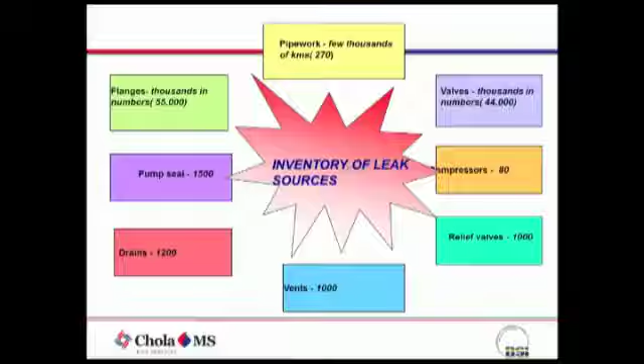The other two things which we play around with and which we know we don't have much grip on is the software part of it, because there is software linking all these things. Yes, we have evolved, but we cannot always say that we have mastered the way we are controlling the reactions. Then the third most important thing which we have not mastered at all is what?

It is nothing but humans. So we don't know when someone will behave in a correct way or not, why he will press a valve, why he won't respond, because the research that is going on is to see how we minimize the alarms in a control room. So you will find that a lot of times a lot of alarms are coming in.

So when a normal person enters, you wonder why he is not responding to so many alarms, but actually in reality a lot of it is information. So a person who is there normally doesn't react, or he may press acceptance and then react to some. So it is a big science by itself, alarm management. So what I have shown you here is only the hardware part of it.

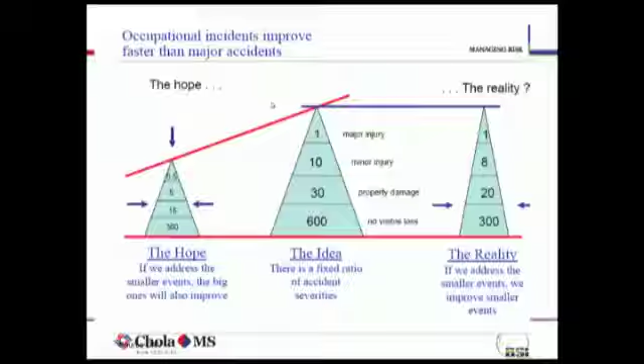The other thing is there is always a relationship. As they say, everything does not happen all of a sudden. Even a catastrophic failure: suppose a 12 mm thickness vessel is there, if it has to have a hole, slowly the thickness has to reduce.

Otherwise, okay, some external object impinging on it making a hole is different, but if it has to fail on its own, over a period of time it gradually reduces because of corrosion or misuse or wrong products being fed into it, then slowly the thickness reduces. So we do not notice that suddenly it fails.

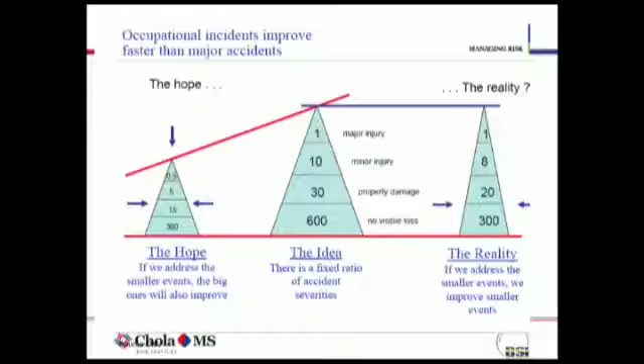So in the same way, there is a theory that for every one incident there will be 600 incidents or happenings which will give a prior notice that something major is going to happen, or the ratio is that for every 600 no visible loss incidents there is going to be one major injury. That is the reality, that is what the equations say in the factory with respect to injuries.

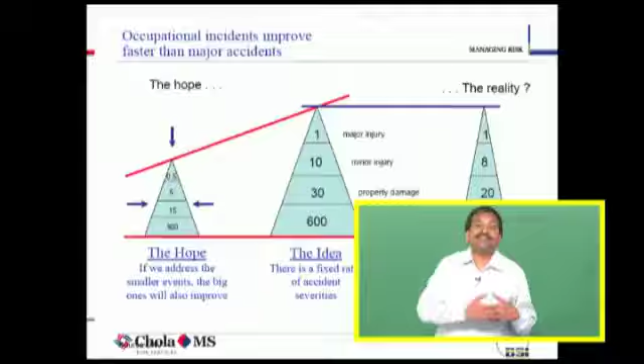That means if somebody has broken his hand or leg or something, before that there will be so many incidents, but people will not notice that this is happening, it is kind of a near miss, and then ultimately one big incident happens. This study was done a long time back, but in process safety unfortunately the ratio is not so large. So every 11 process incidents can result in a fatality. I hope you understand the difference.

Okay. Now a lot of research is going on into what is meant by process defect. If a safety relief valve pops up, is it an incident? Because it just popped up, pressure is more, it popped up and then sat back again, right. If it is happening continuously, do we need to investigate? Is it an incident? Today there is no mechanism by which we are capturing those process related incidents. So that is where the trick lies.

The research is going on how we capture those process defects. Again, you need to define what exactly you mean by process defect. If 1 kilogram of something comes out of a overflow, can it be called a process defect? Can it be failure of some XYZ mechanism? That is something we need to look at.

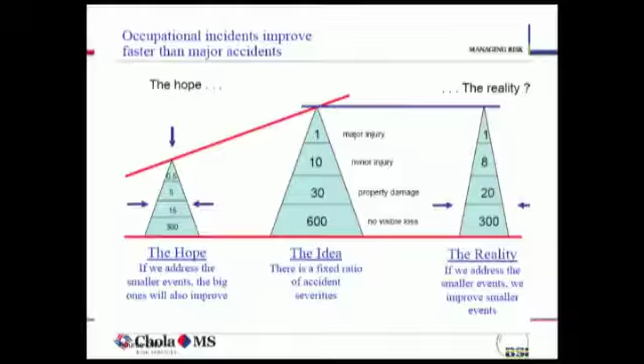So, I hope you are able to get the relationship between the both. In process safety, the ratio is 11:1. In case of industrial safety, normal safety, the ratio is anywhere between 300 to 600 to 1. So this is the major difference, and that is the reason we need to concentrate more on the process safety area.

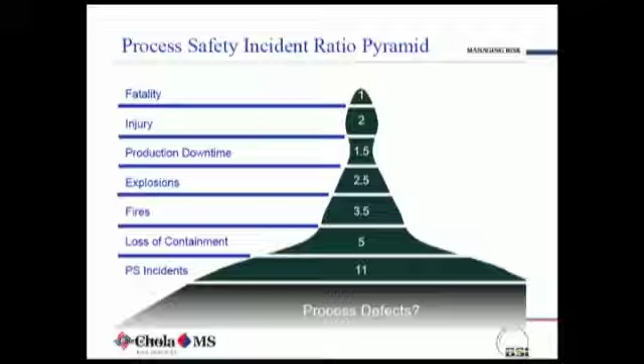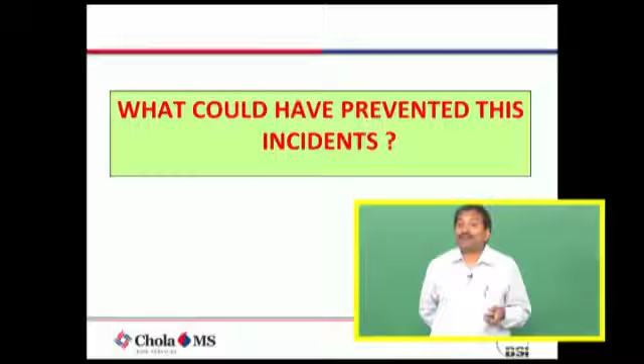Now, what could have prevented these incidents from happening is something that question will ask. So, just being aware about process safety, will it produce those results, or do we need to do something more, is something that is important.

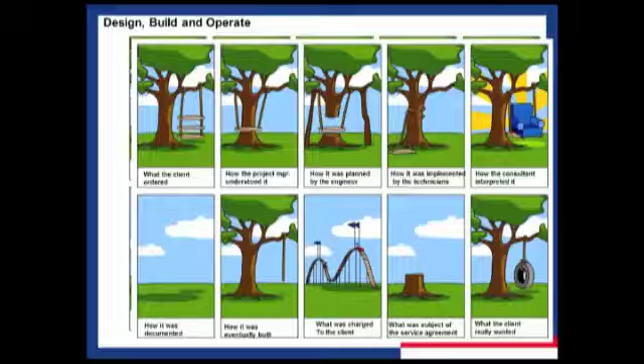So, every time a designer designs things, everyone will have their own imagination to implement things, and then in the process something else happens. So, in process safety also you will find this kind of thing finally happens, and the design many times fails.

So, there is a broad definition of what process safety management is. I hope this was not covered earlier, correct? Covered? No. So, what is process safety management? It says: proactive and systematic identification, evaluation and mitigation or prevention of chemical releases that could occur as a result of failures in process, procedures or equipment.

So, broadly what it is saying: process means your hardware part of it, say temperature, pressure and other things. Procedures is your software part of it, SOP, safe operating procedures, or how we run the plant, and equipment. So, what can result in a chemical release?

So, the point that needs to be noted here is that process safety management evolved as a result of major disasters in the chemical industry. But now the trend is that process safety management is getting applied even to the engineering industry, to oil and gas, and even to steel. Because process safety management talks about proactive and systematic identification, evaluation and mitigation of process, procedures or equipment, and all three things are there even in a steel plant.

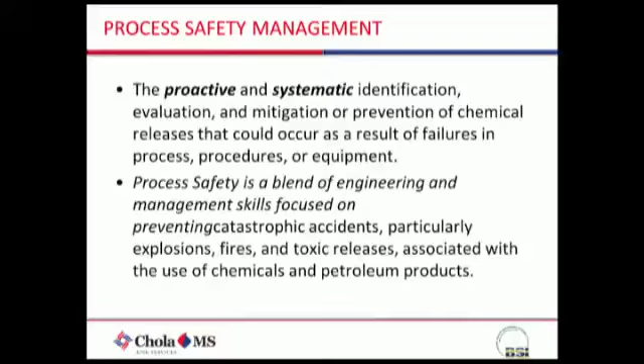See, actually after the Bhopal gas tragedy, a lot of work started in PSM, because one thing that was felt is that normal safety systems are not able to predict this kind of major accident. So, there should be something more that needs to be done. So, when we come to the elements, you will find a lot of elements look very simple, and you will wonder why PSM gives a different color, but the way it is applied is what makes a difference.

So, the goal, that is the fourth line, that is important. The goal is to minimize process incidents by evaluating the whole process. So, a holistic approach to process management is what is making it different from the other approaches of controlling major releases.

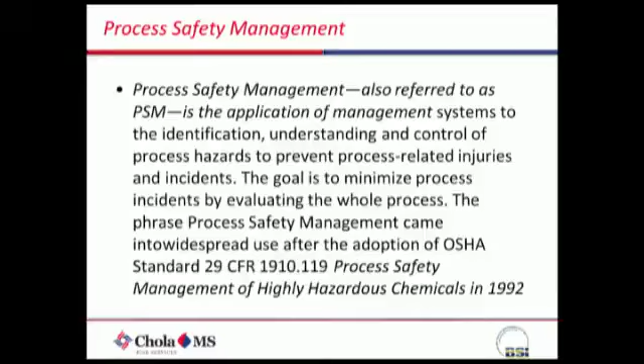So, what happened is, as the definition of process safety propagated to other disciplines like electrical, electronics and other things, each of them came out with their own interpretations and definitions. This is IEC, International Electrotechnical Commission 61511, which is talking about functional safety, which some other lectures will talk about. They have defined risk arising from the process condition caused by abnormal events, including basic process control system malfunction. So, they were talking about DCS systems.

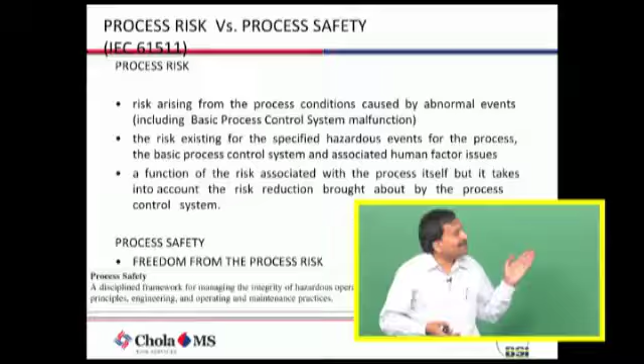So, because the system is not functioning properly, I think you have seen that video of the Texas BP refinery, where you have seen that the basic measurement was not proper, and it was filled to more level than what the instrument can gauge and all that. So, they are relating it with abnormal conditions that can happen because the process conditions are not correctly controlled.

Then the risk existing for specified hazardous process events for the process, the basic process control system and associated human factor issues, a function of the risk associated with the process itself, but takes into account the risk reduction brought about by the process control system.

See, what happens is, when you broadly define the risk, everyone will ask, okay, so we have this control system. If this control system fails, then we have some other containment system. Even if this containment system is having some problem, then we have other control system to mitigate the risk. Then why should we worry so much? So, in process safety, when you systematically evaluate the various risks, you will also give credit to the existing risk control measures, right.

I will make it very simple. Say, suppose this building is there. What can go wrong in this studio? It can catch fire. Now, if it catches fire, then what happens? Everything gets destroyed, right. So, what is the basic control measure that is there? Fire extinguisher is after the fire starts, but first detecting that there is a fire. So, you will find some smoke detectors and other things. So, that is the fundamental thing that you detect, that is one level of control.

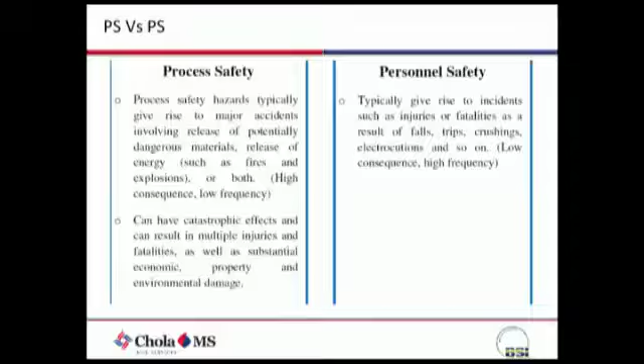Now there is a comparison which I already mentioned to you: one typically gives rise to major accidents, the other typically gives rise to incidents such as injuries and fatalities. The thing you need to know here is that fatalities happen on both sides. It is not that only slips, trips and falls fall into personnel safety; fatalities can happen on both sides, but the severity will be quite high on the process safety side.

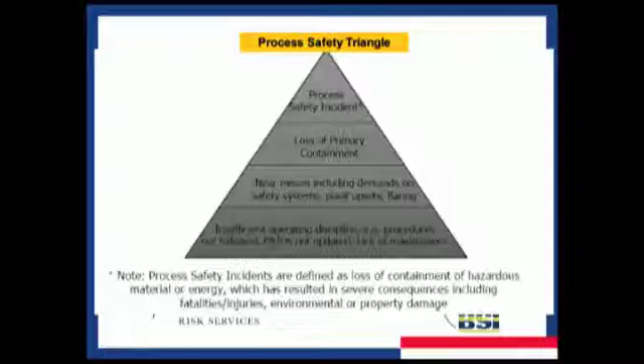Like the injury triangle or safety triangle, they have also constituted what is called the process safety triangle. The topmost thing, which you call a process safety incident, will primarily be loss of primary containment. That means you have a vessel and material has come out of it; that is the major thing that can happen. Near misses, including demands on safety systems, plant upsets, and flaring, are one level below.

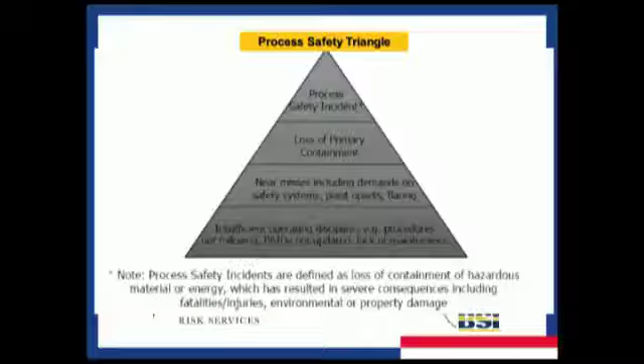Before loss of primary containment happens, there could be near misses, including demands on safety systems. Suppose it's a 20 feet vessel; you will not fill the vessel up to 20 feet. Up to what level will you fill? Maybe 18 feet. So what will you put there at 18 feet? You will put a high level alarm, correct? Yes or no? Then you will have low level just one step below, and above that you will have high level, right. So those are all near misses, including demands on safety systems.

Your valve or your pump is supposed to close at 17.89, but it has touched 18 and it has triggered. That means maybe the sediment level is more. There could be so many other things which have resulted in that, or the valve is passing, or maybe there is a defect in the gauge.

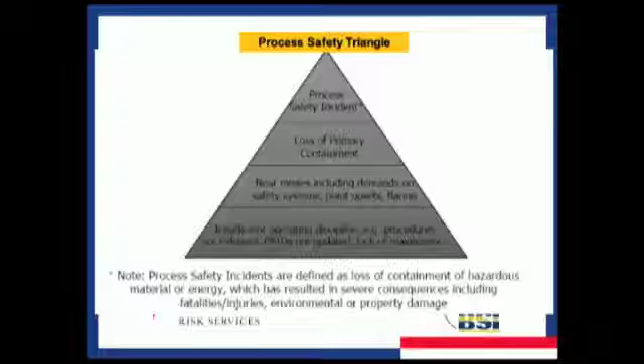So, those are all the things which we will talk about: near misses, including demands on safety system and plant upsets. Flaring is something which is always investigated, because it is not from the economy point of view, but you are forced to send it to the flare, right. Flare is nothing but a process upset, then it goes straight to the flare, apart from the normal things that happen. So, whenever flaring happens, that also sometimes is recorded.

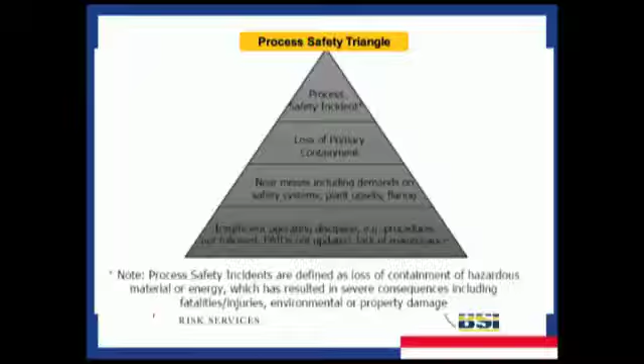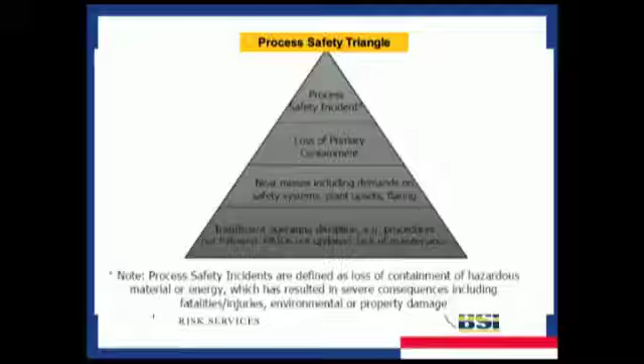Then insufficient operating discipline, for example procedures not followed, P&ID not updated, lack of maintenance. So, these are all the bottommost rung. Before a process safety incident happens, these are all the things that can go wrong, like insufficient operating discipline. What does it mean? Because for every operating plant you have something called operating parameters. The operator is supposed to follow that rule book, but supposing he does not follow, then operating discipline is not there.

Then procedures not followed means he has to follow certain procedures of loading, unloading, maintaining pressure, temperature and all, but over a period of time we develop so much confidence in the process that we know, okay, this is the shortcut, or this is the way we do. So, that results in the procedures not followed. P&ID not updated: piping and instrumentation diagrams. You may make changes, but then you do not modify that in the as-built drawings. So, that can result in that.

Then lack of maintenance: you need to look at the maintenance of equipment, but then you give priority to production, and that results in this. So, from the bottommost, if you do not have operating discipline, you do not follow the procedures, which can lead to near misses including demands on safety system, which can result in loss of primary containment and finally lead to a process safety incident. So, that is how the sequence follows.

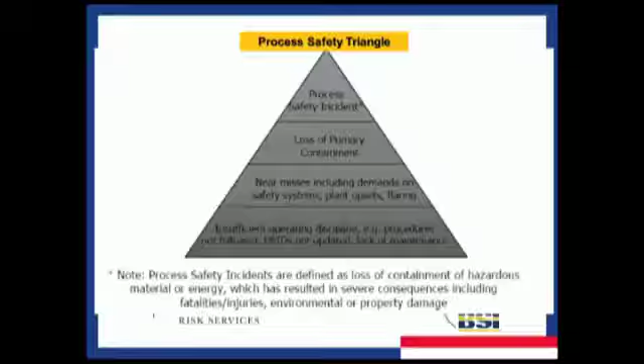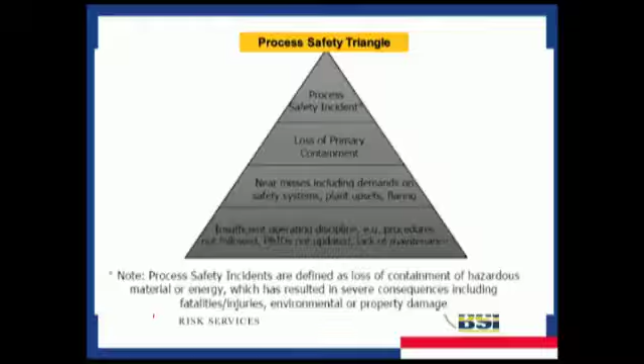Now, there are some myths, because PSM, to be very honest, in India is not yet accepted. I would say still only a handful of companies are following PSM, for a variety of reasons. One is lack of understanding, lack of expertise, and third is that we also have insufficient knowledge on some of these things. And the fifth important point we should keep in mind is that our legislation does not mandate PSM yet. We are all legislation-driven people; we do not follow certain things because they are good practices to follow.

We still, quote unquote, think that something needs to be done because the government said so. So, PSM is not yet mandatory. Some of the myths associated with PSM: a lot of people think that it is a performance-based approach, or that one approach is do whatever it takes on your facility not to have accidents. Some people think like that. No people, no PSM. An analytical tool focused on preventing release of highly hazardous chemicals, and some people have a misconception that PSM deals with trips and falls.

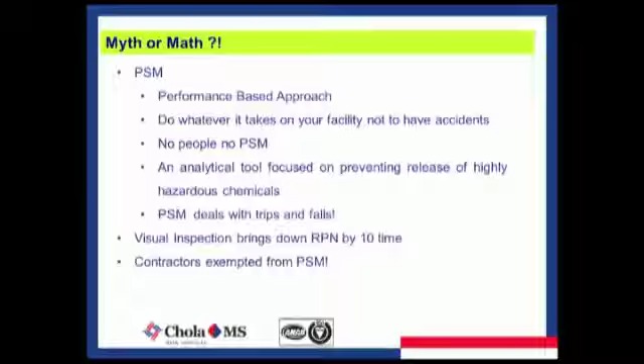Another most important thing is contractors exempted from PSM, because if you see some of the factories now, except the core operations, the rest is all run by contractors. Even in public sector undertakings, you can find that a lot of things are run by contractors. So, you can't differentiate contractors from the main operators. Contractors are also required to follow this.

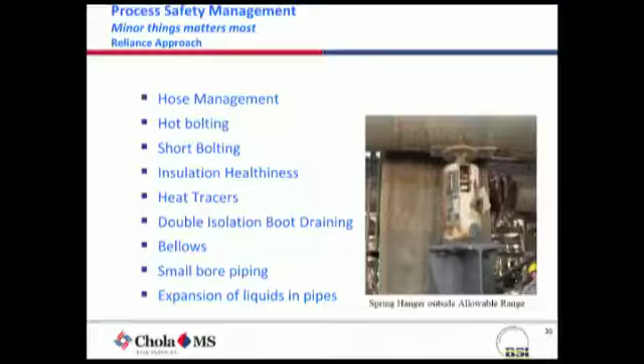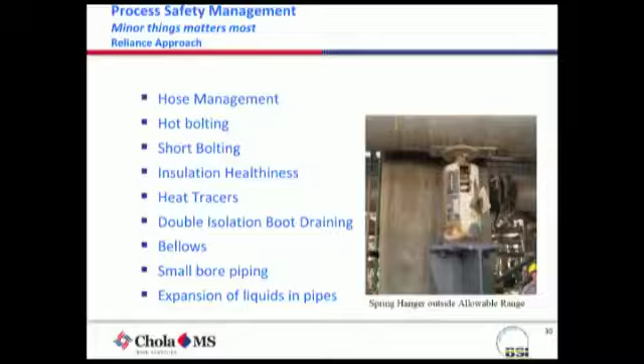So, in a typical PSM, for example a typical valve, if you follow PSM processes, there are so many things we talk about in maintenance. This you will not find in the normal approach to safety management. Only when you follow PSM will you do that. Now, it will talk about insulation healthiness, right. Insulation healthiness is a big topic by itself. How do you measure healthiness? Because it is all closed, right.

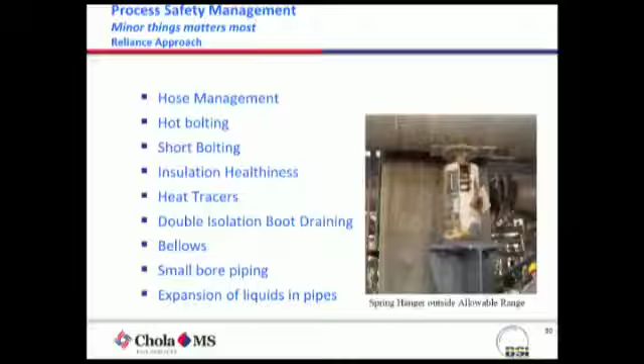One easy way of measuring insulation healthiness is doing thermography. When you do thermography, it gives a profile of the insulation, whether the temperature gradient is uniform, or wherever insulation weakness is there, you will find that the temperature gradient shows more.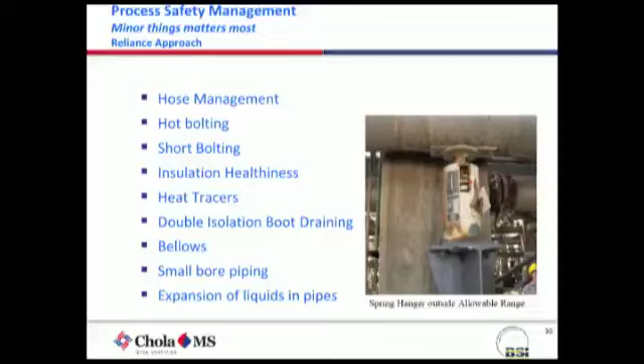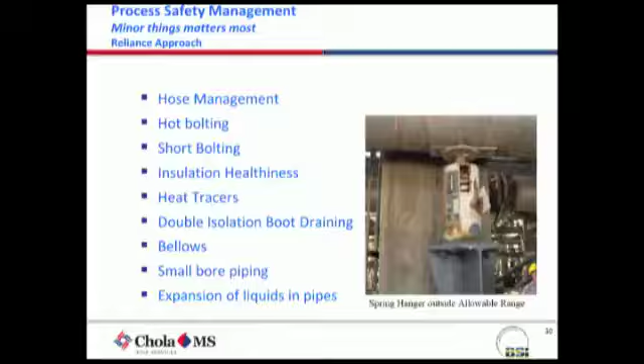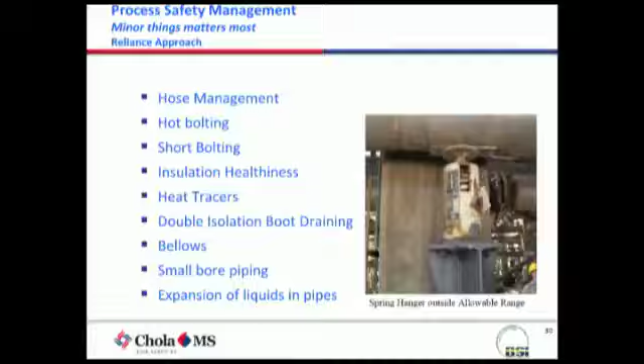Then how the bellows are there, and how small bore piping is being done, expansion of liquids in pipes. And the other most important thing which is neglected in 9 out of 10 companies is hose management. You will have lot of places unloading hoses, lot of places connections, but nobody has a clue on hose management.

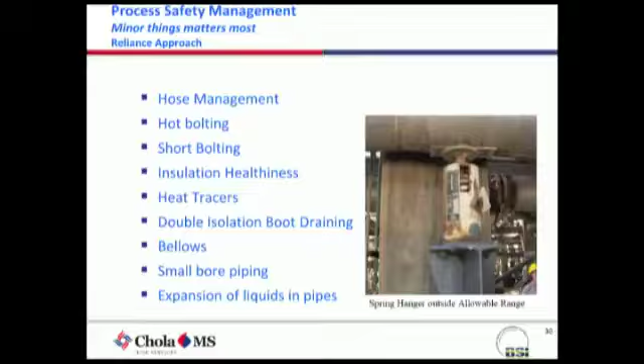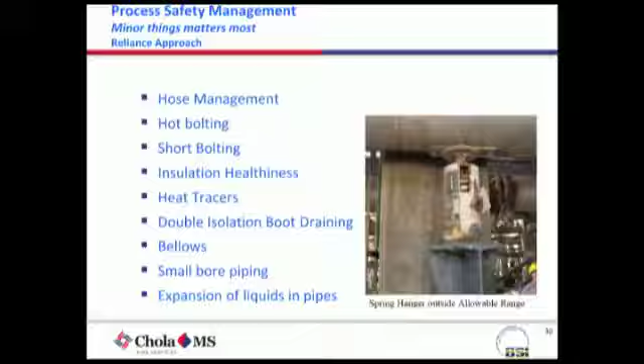So, PSM, while it talks about minimizing the incidents arising out of failures of all this, ask the crucial questions: how you are doing hose management in your company. You will find that no answers will be forthcoming. Most of it is that we replace hoses when they fail. We do not check for hydraulic pressure, we do not check for periodic inspection, we do not check for compatibility, lot of things can happen because of that.

Okay. Just to give a further understanding, how does an indicator look like? In a personal safety program, you will talk about how many first aid cases. You will talk about hours lost to injuries; in the Factories Act and all, you might have heard about lost time injuries and all that. So, those things will be talked about, and recorded incidents that could have resulted in personal injury, exposure due to improper non-use of PPEs.

But when same company talks about process safety, it will talk about number of failure of critical equipment, because in a plant not everything is critical equipment. There are some things which you need to monitor very closely, like ammonia compressor, or cooling water circuit for an ethylene cracker. Those are the critical equipment. So, you will see the number of failure of critical equipment, incidents of loss of containments, right.

Earlier days, when we were talking about only safety, we never talked about if something leaks. We used to take it as slip and fall, trip and fall, because something is leaking. We never asked a question, why this leak has happened, is it 1 kg or 5 kg or 10 kg, and is it trying to indicate to us that there is anything wrong. Then fires, exposures caused by process failures.

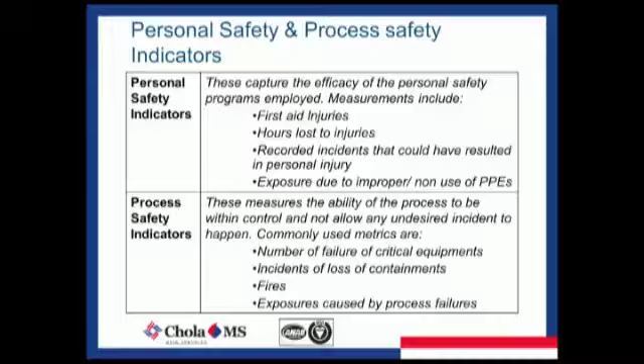See, that means if there is a sudden release of a toxic chemical from the process plant, we are asking to record it; it is a process safety incident. Do not treat it as the guys are not wearing a PPE and thereby it caused an accident. Exposure caused by process failure is something which needs to be separately indicated. I will show you more of that.

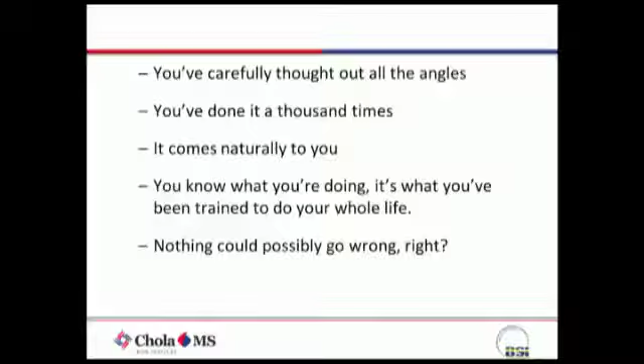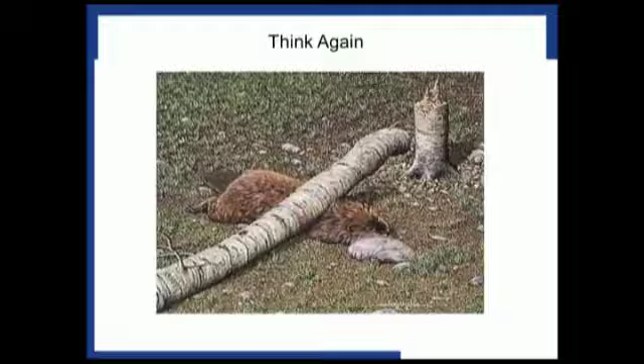So, as I told you in the first class, it is like a football goal. You may have a goalkeeper, you may have so many defenders, but a goal will be scored from some angle or other. So, the only thing we are trying to do by all this is that we are changing the probability for the better.

So, quickly before we go into some more topics of PSM, I thought I should take you through a couple of case studies. This is one where, again after doing so many things, a major incident happened in Jaipur. Why I am citing this case is that this is one of the big incidents that happened in the recent past, in 2009.

Those of you who are interested can download a small report, it is called the M.B. Lal committee report. Dipin, you can please circulate it to the participants, it is available online. If you do not get it, ask me. It is a small document about 29 or 30 pages. I urge you to read that. So, this is after the incident. After this incident, lot of changes in the Indian oil and gas industry, lot of studies, new standards; OISD is working on some more criteria.

So, if you look at it, it is a big one and also it triggered a big debate in the media and in the government circles, because a lot of factories started some 20 or 30 years back, but the cities have moved towards them. Now, you have a lot of neighborhoods next to this. Now, you can always argue both ways, right: the city has developed, so these guys should have moved somewhere, or they should have installed the latest equipment so that they have taken the risk into consideration. But both things have not happened.

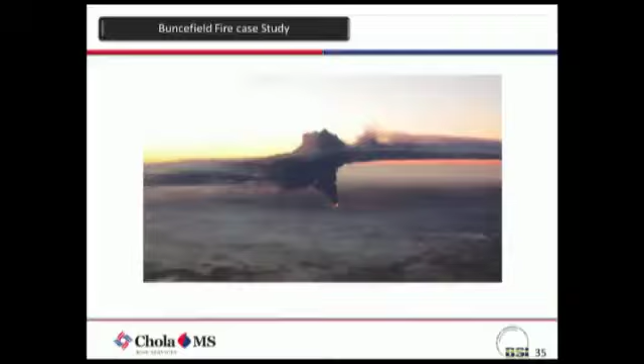Similarly, this one incident is 2009. Before that there was one more incident of a similar nature, but not in our country, in the UK, more or less in 2005, a similar overflow and leak, and you can see here the overflow at 550 cubic meters per hour pumping rate. So imagine you pump at that rate for more than half an hour, how much quantity would have come out. Now, why I am sharing both these incidents is that they triggered a mass of debate among controlling authorities, designers, safety engineers, environmentalists, everyone, on how we treat some of these things.

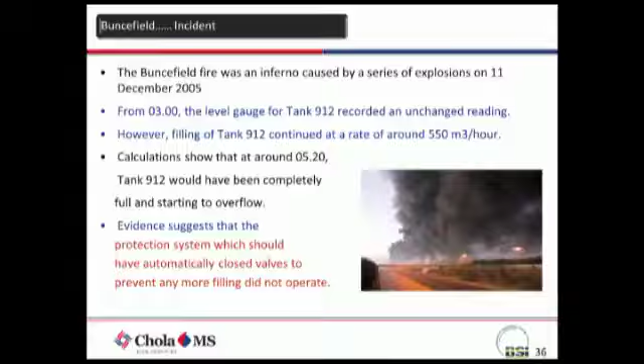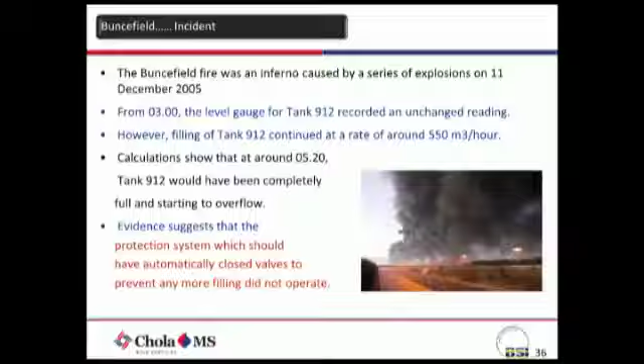And also people started questioning: when we have so many systems, how do we ensure that the system does not fail, because you are putting together a lot of systems. You are saying there should be a valve, there should be a detector, then there is an overflow mechanism, then there is a control room and all that, but all these things are failing, and then you have massive releases like this, which is shaking the confidence of people in having facilities of such a large nature.

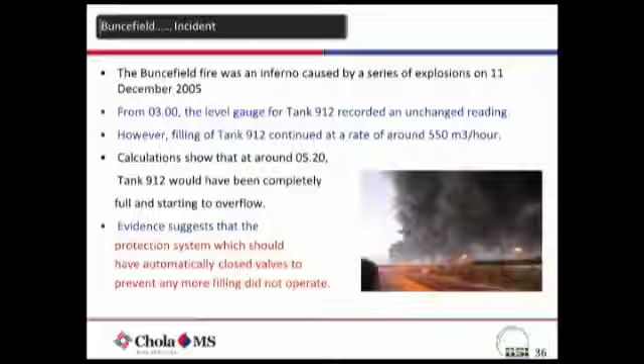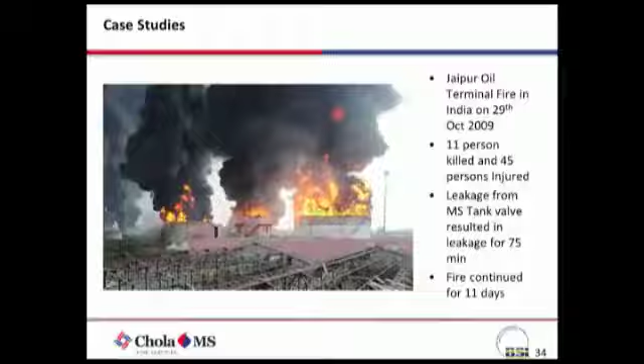So these two incidents, if you look at it, resulted in a lot of legislation across the world after the incidents. In case of the Jaipur incident, after the MB Lal committee report, all the oil installations, meaning oil depots, which number around 1500, were asked to do safety studies like QRA, HAZOP and other things, and also go for safety integrity level instruments of level 3 or level 4.

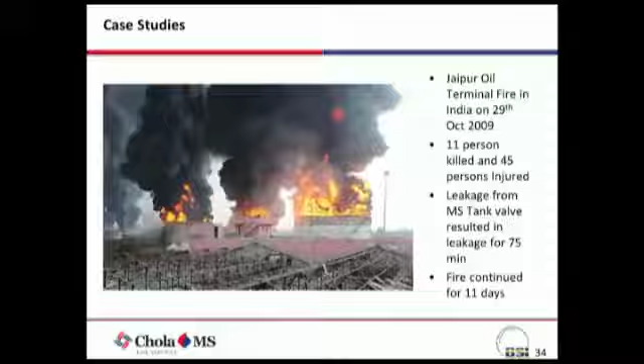So even after 5 or 6 years now, I would say that only 10% of the installations were able to do complete studies and then implement a number of things. So it takes a long process. It's not that I wish, I replace the valve, and then the safety level rises. It takes a lot of time for these things to move up.

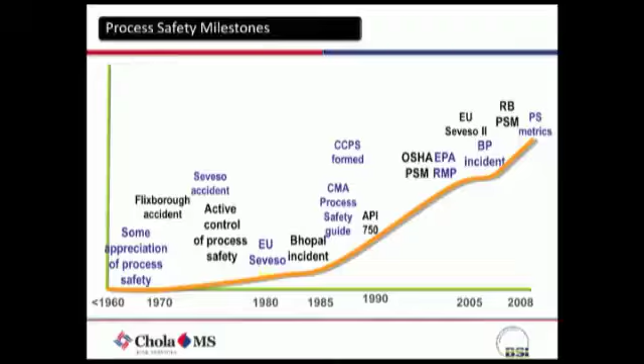So, one of the things, yeah, okay. So, we are continuing up to 6 o'clock. Okay, right.

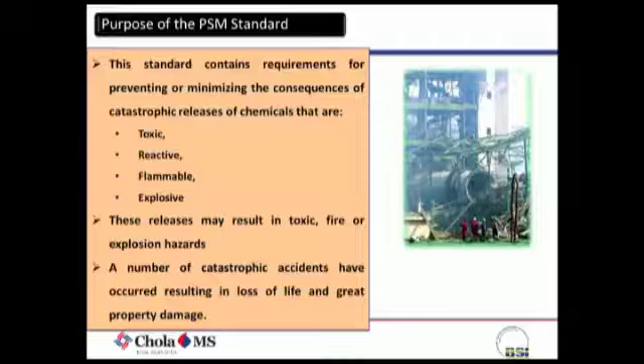So, if you look at the PSM standard, what is the purpose? The purpose is the requirements of preventing or minimizing the consequences of catastrophic release of chemicals that are toxic, reactive, flammable, explosive, because there are so many chemicals in this world. There is a rough estimate that more than 3000 chemicals are there.

Now, there are two things that are important. Even our body has got a lot of chemicals inside for the digestive process, maintaining the balance and all that. So there cannot be standards regulating these things. So we need to define what is applicable to us, otherwise the PSM standard will be applicable to our body also, correct.

So, what we are saying here is that the PSM standard is not a prescriptive kind of thing. It gives broadly the outlines and leaves it to you to draw up the processes you need to adopt. So, a performance based standard is what is being shown here: focus on what must be done rather than how it should be done. They will say you adopt a PSM standard, these should be the elements. You can add more elements, or you can say these elements I will focus on in my company, or these elements I do not focus on. It will not say this is what success looks like, that is very important.

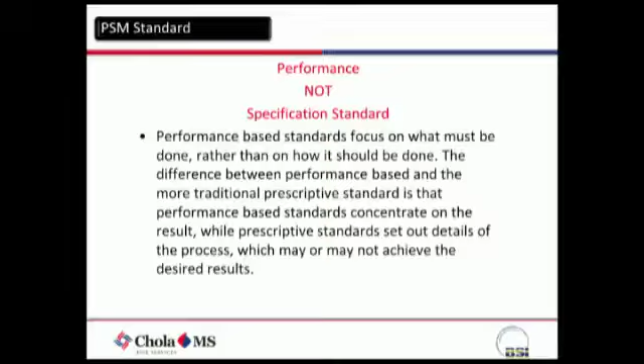The difference between performance based and the more traditional prescriptive standard is that the performance based standard concentrates on the result, while the prescriptive standard sets out the details of the process which may or may not achieve the desired result. For example, they will say the spacing between two detectors should be 750 mm, but whether it will really prevent the fire or not, nobody can say, because there are so many variants. Whereas PSM, which is a performance standard, broadly says that if this is the risk, go for detectors. It does not talk about the design part. I hope you understand the difference between the two.

These are the various elements of PSM. So, what PSM finally is, is now coming. It talks about employee participation, process safety information, process hazard analysis, operating procedures, training, contractor safety, pre-startup safety review, mechanical integrity, hot work permits, management of change, incident investigation, emergency planning, compliance safety audits and trade secrets.

Now, among these, the most important thing for chemical engineers is process hazard analysis. That is where the rest of the classes go, if you see the syllabus, because the most important thing is the process hazard analysis, PHA. The various safety engineering techniques you use, I will show you a little later. My count is a little old, but my guess now is that there are about 50 different techniques in safety engineering itself.

So, each of these techniques will identify the process hazard in different ways. No one technique can identify all the hazards that are there. Okay. Then these are all related.

Then the other important thing you need to concentrate on, if you want to become a PSM engineer, is mechanical integrity. Now, mechanical integrity is all about how we ensure optimal performance from the machinery that we have, as simple as that. Now, there is a big program, and each of the issues with respect to mechanical integrity in PSM is the most interesting part, because you will find routinely that this is the breach that happens in plants, which can result in failure of various equipment, resulting in major losses.

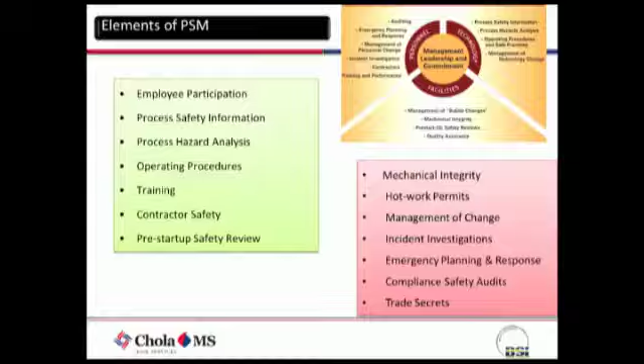So, if you are not strong in this element, then what happens? A few people will argue for a change, you will go ahead with the change, and tomorrow if the compressor fails, what will the manufacturer say? You never asked me, you only said one sensor had a fault; I never told you to go ahead and do that. So, the production and project people will always press for startup, because for them there are deadlines and project completion.

They will hand over the project and go away, but the operating people will be left with something which does not work or fails, so they have to be answerable. So, management of change is something which talks about that.

So, we have talked about process hazard analysis for you to focus on, mechanical integrity, management of change, and to an extent contractor safety is also very important, because all said and done you may say that their integration is proper, we have done induction, we have done XYZ and all that, but the contractor is a little distant from the normal person, and sometimes they come only for a temporary thing and may not understand the philosophy of the way you are operating. That can result in major incidents.

And also if you look at the major incidents that have happened, they more or less all involved contractors. That is the reason why in PSM contractor safety has been brought in as an element.

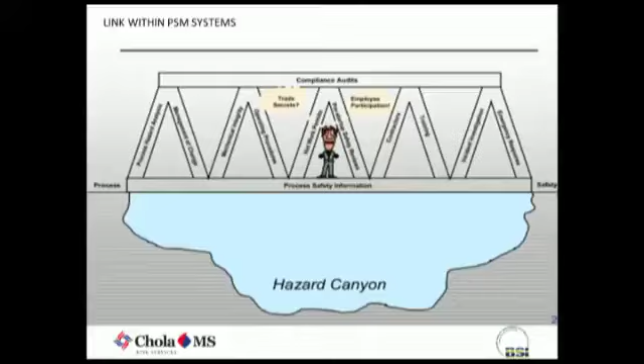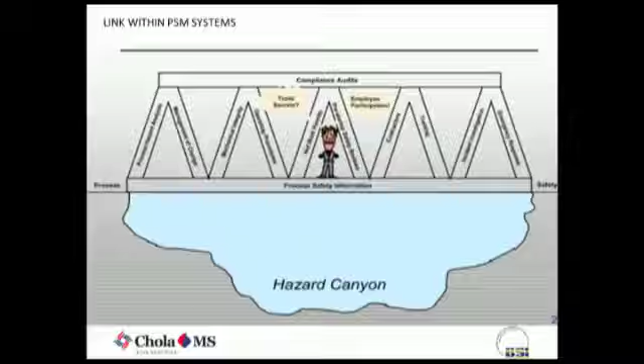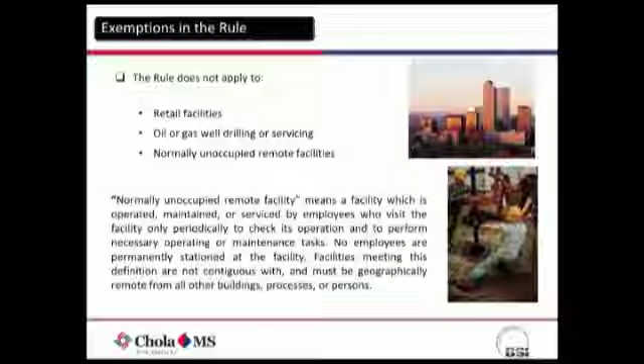So, this is the link that is there between the various elements. You can see here process safety information is a kind of link between all the elements, and compliance audits are sitting on the top. For everything you do, you need to comply with something. There are some exemptions, like it is not applied to retail facilities or remote facilities, things like that, but otherwise it can be applied to anything.

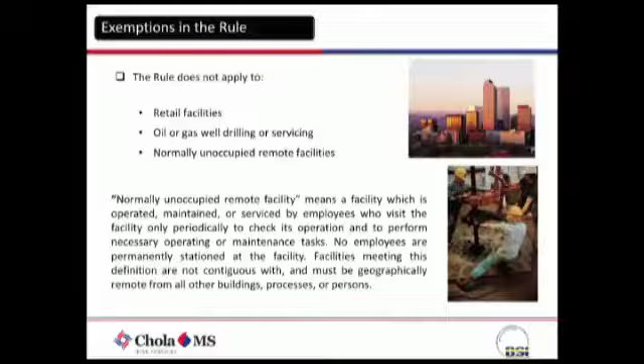Now, we will discuss a little bit more about some of these elements before we go into some things on QRA, a basic understanding. Anyway, there is a separate class on QRA where you will be using the software and other things.

Now, process safety information is something which is very critical and very difficult to assemble, especially in old plants, because they will have lost records. A lot of it is done because it is done that way, and nobody will have a clue on this process safety information. So, the written information should be on hazards of the process, technology of the process, and the equipment in the process. This may appear very simple, but I will cite an investigation which we did about 3 or 4 years back.

It is a very simple process, but it has all the elements of the things I am talking about here. This plant located south of Chennai was in operation for more than 25 years. It is a simple process. They mine the sand and the ore from a beach, and they put it in a steel vessel of 6 tons, maybe 2.5 meters by about 1.5 meters. They put all this into that, add sulfuric acid and rotate it for 5 days, at a pressure.

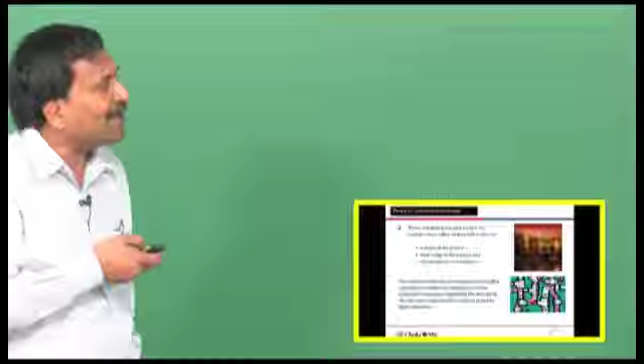See, imagine, are your LKG books with you? No. Suppose I ask, take out subject number 2, lesson number 3, what did you do, where is the information? There is no information. Plants, equipment, operators, everything happens like that over a period of time. The equipment in the process also, so many modifications and all that. So, nothing was there in the plant, but for you to do an investigation, all that is required.

You require a standard operating procedure, you want to know the logic of doing it for 5 days, you want to know the reaction kinetics, the process control information, who decided that this is the way this vessel will operate, what is the mechanical integrity of the equipment, what pressure it is designed for, because it just lifted off, the bolts and everything got sheared off. Now the evidence is there that it has gone 110 meters and landed within their premises, broken. So, there is an opening.

Now, this is the information, but what you are asking for, they said we do not have, we do not know. We only have some documents to show how much material we are putting in, how much sulfuric acid, what time, only that kind of sheets are there. Maybe we have to dig into archives. So, process safety information is very critical for doing the process hazard analysis, right.

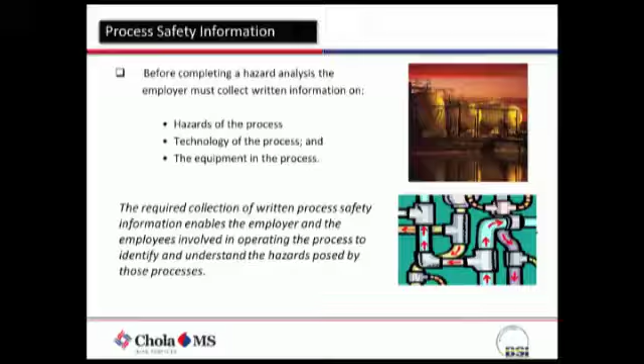This usually starts with the design. It starts with the design of equipment, consideration of chemicals, consideration of the reactants, from R&D to the scale-up operations, the batch processes, and then the design. Everything comes into that picture. Technology of the process is also very important. Why you adopted the technology, what issues you considered while adopting it, what were the limitations, why you could not do the latest, is always very interesting. We may think that it is simple, but a lot of times the decisions are taken based on the available knowledge.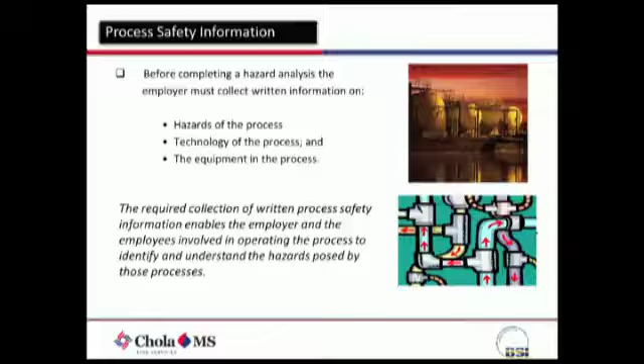Okay. Then the equipment in the process, how did you select the equipment, what were the limitations, what were the design features the supplier considered before he supplied, all that is important. So, process safety information forms a key thing in PHA as well as in management of change, because if you are changing something, then definitely you need to know why that is going to affect.

Toxicity information, the basic thing, have you ever seen a material safety data sheet? You are all familiar. What is the latest in MSDS, what is it called now? Are you aware? It is called International Chemical Safety Card or something. The European Union has come out with that new thing, which is even simpler than MSDS, because sometimes the MSDS can be very lengthy, 5 pages, 10 pages, difficult to find information.

Now, in India there are standards available; even in the Factories Act, in the annexure at the back, they have given the MSDS information. Basically it talks about the physical reactivity, corrosivity and all that. In our earlier days, when I was young like you, one of the first activities we did was to prepare MSDS. Even though MSDS for sulfuric acid is there, MSDS for XYZ is there, the process of preparing an MSDS exposes you to so many hazards, makes you familiar with the hazards of various chemicals.

Apart from that, a lot of MSDS may not give information on PPE to be used, may not give information on how to store small quantities, how to store big quantities, and what are the standards to be adopted for that.

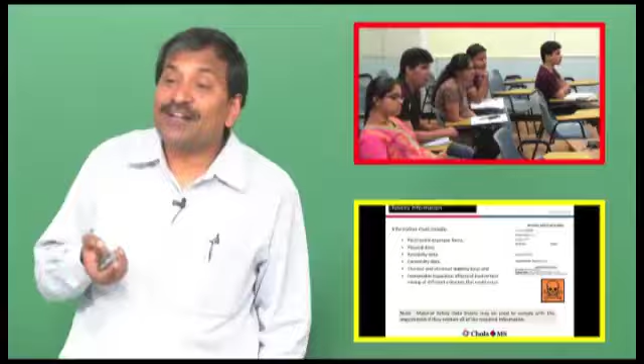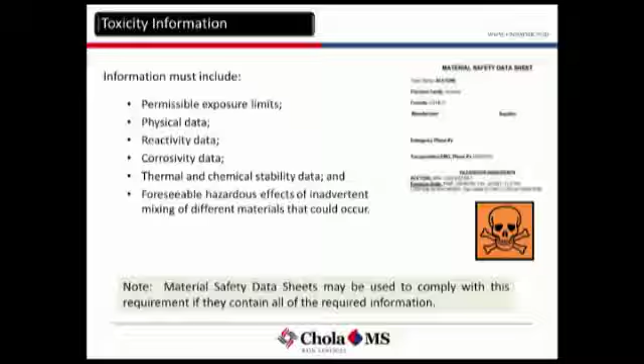Then it may not also contain information on spill control. So, it is not just the physical, reactivity, corrosivity data; it should also give other data related with the chemicals, like antidotes, which is again very important information. If you do not have antidotes, how do we handle emergencies?

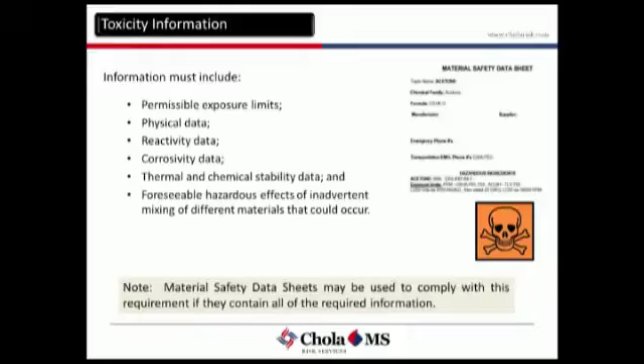PHA, some part of it will be talked to you. Here they have only talked about what-if, HAZOP, FMEA, FTA, but there are a lot of other techniques. I just wanted to show you these are the techniques which I am talking about.

If you see, there are 7 different stages of the plant we are talking about: concept, process, design, commissioning, operations, modification and decommissioning. So, at all the 7 stages of the plant you can use different techniques to understand hazards associated with its operations. So, this is one you can see here.

Now, how many of the risk studies are covered in this, I would not say even 15-20%. This is again a little old, it dates back at least 3 years. In this, as far as I know, 7 or 8 more studies have been added. So, if somebody wants to specialize in the area of PSM, I am not saying he should be familiar with all of them, because by the time he gets familiar he can retire.

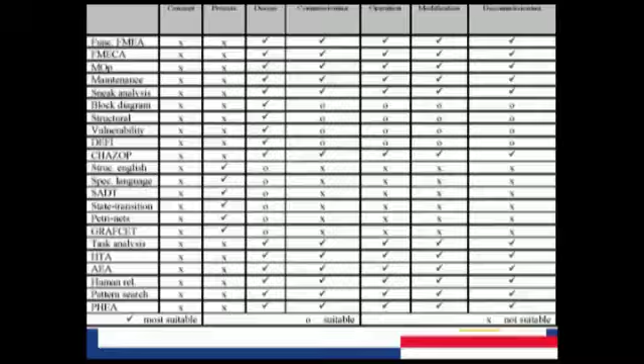So, he should have at least familiarity with 4 or 5 techniques minimum, at a professional level. That is where it helps you or improves your knowledge. So, the idea of showing this slide is that at each of the stages of the plant you can apply different techniques to get more information about the hazards associated with those operations. Hope it is clear.

So, at this point of time it is enough for you to know that these are the techniques that are available. My favorite technique is always inherently safe design, which is something very interesting. It asks very pertinent questions on how you ensure safety inherently in the process itself. So, it goes much deeper than many other techniques that you see here.

Now, after so many years, oil companies have started adopting inherently safe design as a prerequisite before they go into the design. So, they are asking designers to prove that they have considered these techniques. For example, there is a starting stage, an end product, and intermediate storage. Like in the Bhopal gas tragedy, MIC is an intermediate product, it is not the end product. Do you agree with me?

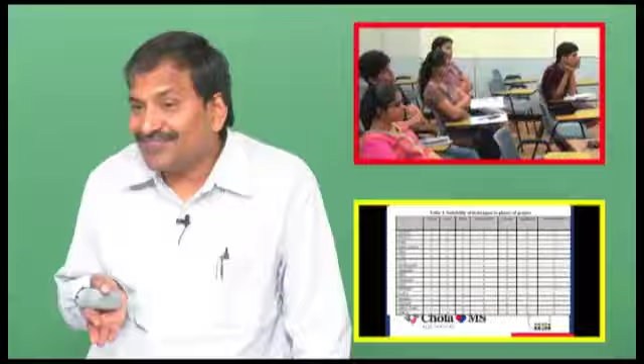So, if it were inherently safe design, they would have asked why the hell you want an intermediate stage, or it could be one step before it becomes really toxic. So, whatever you produce at the intermediate stage, you immediately process and make it into a safe stage, or you design in such a fashion that you will have only a small quantity to process. In case it releases, it does not cause a problem.

I think tomorrow I will share with you a questionnaire on inherently safe design. It provokes lots of thoughts, asking you why it cannot be done. So, the designer has to answer this before he goes into design.

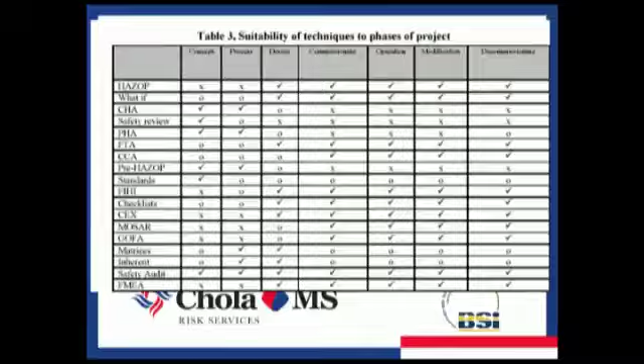Okay. We have some more time, or we need to close?

5 minutes more, okay. Can we just go into the QRA, because this is the most interesting thing, and I will only broadly give the idea, because my subsequent colleagues, Arul Arasu and others, will take complete sessions on this.

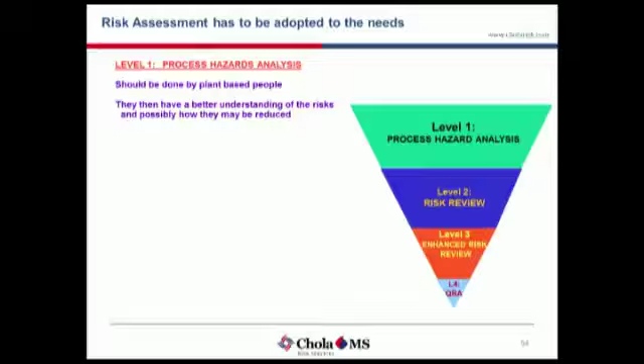So, we are saying that risk assessment has to be based on the plant. Level 1 is process hazard analysis; it should be done by the plant-based people because they understand the risk and how it can be reduced, and they may have their views.

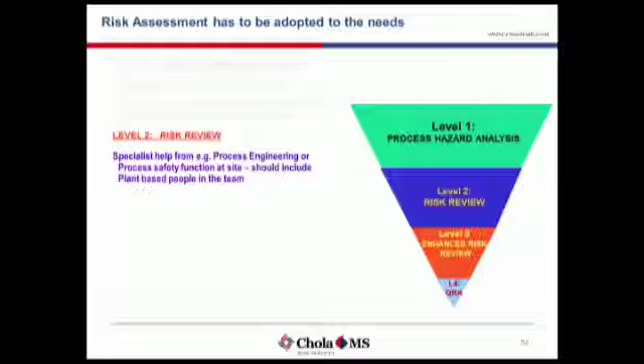Then, risk review specialists from process engineering or the process safety function at site should include plant-based people in the team. Then we have enhanced risk review and quantitative risk assessment. So, we are saying that QRA should be done with outside help.

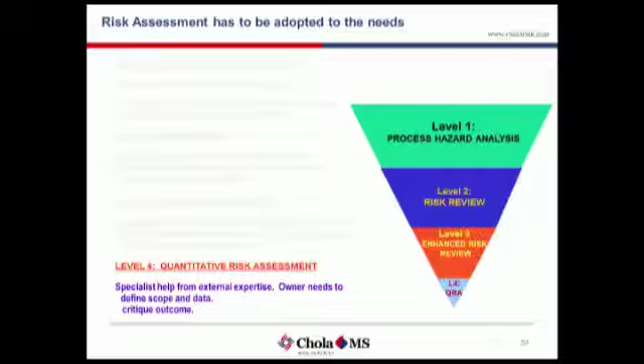Now, out of all the techniques of PHA, QRA is something which has gained a lot of popularity, not because it deals with the numbers, but because it is able to tell people how big the problem is going to be.

Like suppose you have 3000 tons of ammonia. We know it is hazardous, and if it leaks it can cause harm, but will it cause a problem at 10 kilometers, at 5 kilometers, or at just 10 meters? So, QRA will help you determine how far the problem can reach.

It also has an interesting feature. People invest in a lot of technology in mitigating the hazard. Say you take the same ammonia tank. One of the ways of knocking down ammonia vapor when it leaks is to have a water curtain. If the vapor is leaking and you have a big water curtain around the storage and start it, the vapor will contact the water and some of it can be knocked down. Now, there is a risk reduction.

Now, whether the risk is coming into the acceptable range or not is something you want to know, whether one water curtain is okay, 2 water curtains are okay, or 3 water curtains are required. How do I determine that? QRA helps you understand in numbers how much of the risk you are able to break down. I will give you a simple example.

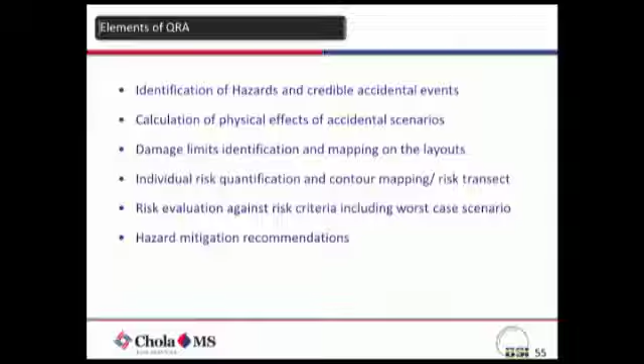Damage limits identification mapping on the layout. So, it will tell you 30 meters or 20 meters it will damage in case 5 tons of chlorine leaks, how far it will go with this wind speed. You can always argue this wind speed cannot happen. I have assumed 1.5 meters per second; what if it is 2.5 meters per second? This 1.5 meters per second is selected based on the wind pattern, the majority wind that is blowing.

Winds won't change over a period of time. 100 years, 200, it remains the same. For the wind pattern to change, it will take 500 to 1000 years. Anyway, our plant is not built for that long, correct? Any building maximum is 100 or 150 years. So we are talking about that time span.

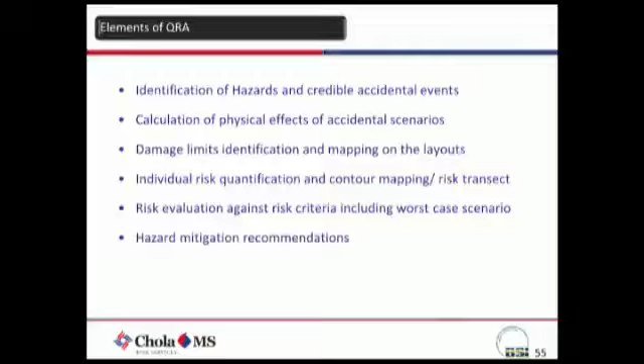Individual risk quantification and contour mapping, risk evaluation against risk criteria including worst case scenario, hazard mitigation recommendation. So we will broadly say this is the way the hazard can be brought down. But again, as I mentioned to you, it cannot be brought down to 0. It is an approximation. I admit this point.